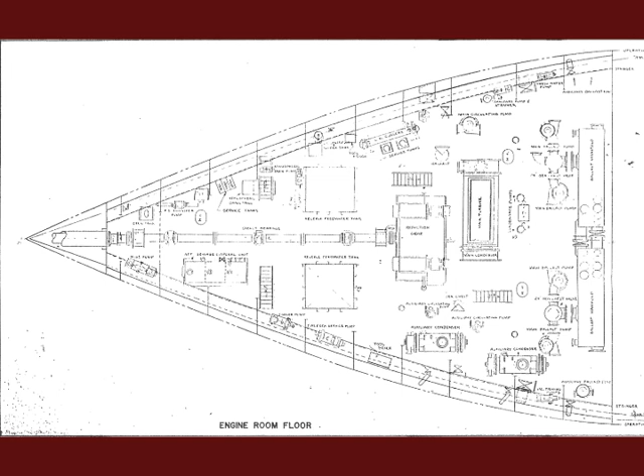Let's start with the lower engine room. For the steam engine, there's the gearbox and the condenser. The auxiliary condensers are for the turbo alternators above. There are 4 ballast pumps and a large circulating pump for the main condenser.

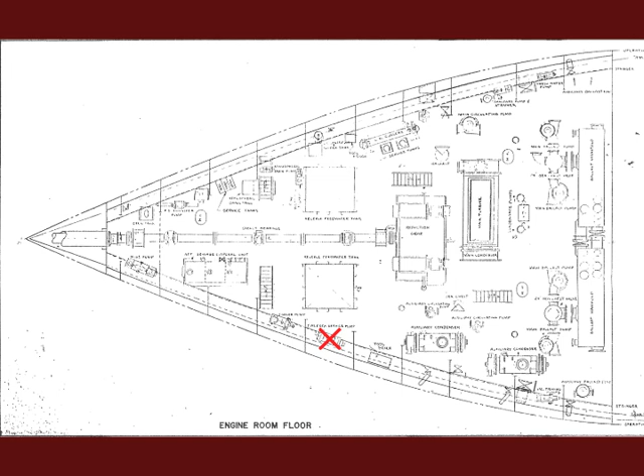The generator's condensers have their own circulating pumps. Here are feed water tanks. And here is the fire pump. This right here is the sewage tank.

This is the middle engine room. The Edward L Ryerson had a lot of power, more power than the average ship. This is the main engine. It's a 9,900 horsepower steam turbine. Here are the 650 kilowatt turbo generators.

Here are the 2 boilers. All 3 condensers have vacuum ejectors. There are 2 feed water pumps. One is electric powered, the other is steam turbine powered. This right here is the control center.

Steam is used to preheat the feed water. Here is the first stage feed water heater and the third stage feed water heater. This room right here is the chief engineer's office. This is the evaporator which creates distilled water.

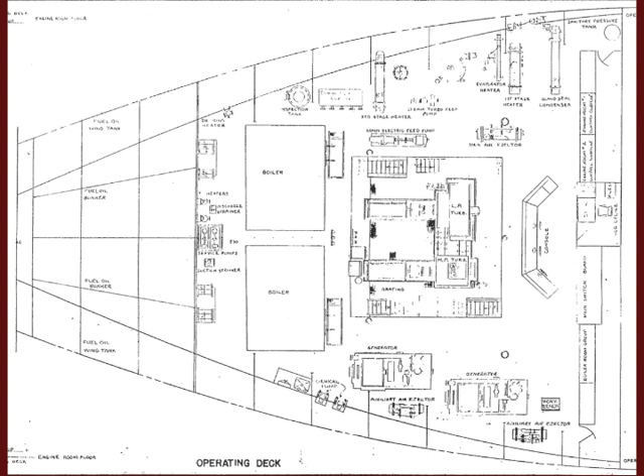This is the sanitary pressure tank which creates pressure to make water flow through the pipes for the crew to use. This is the upper engine room. In the back is the power steering hydraulics. Going forward is a tunnel through the oil tanks. The oil tanks start in the middle engine room.

Then we get back to the boilers. Here are the water heaters for hot water for the crew. This is the locker room right here, and on each side of the ship, there are the doors where you get in. This is the chief engineer's office. On the port side of the upper engine room, there is the machine shop.

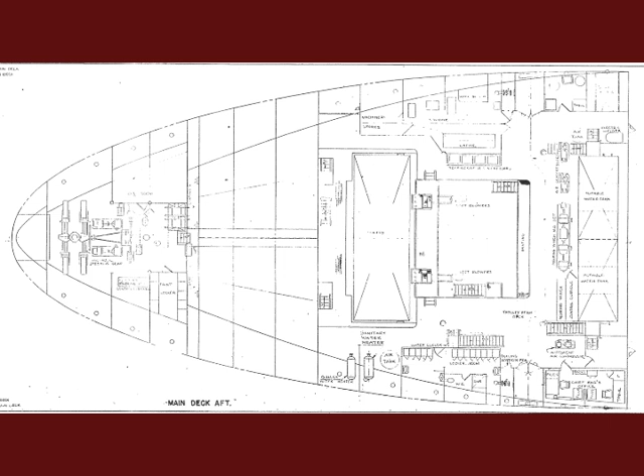This device is a motor generator unit, which converts alternating current into direct current for the deck winches. Right here is an air compressor, and right here are the potable water tanks. These are the doors that lead into the tunnels.

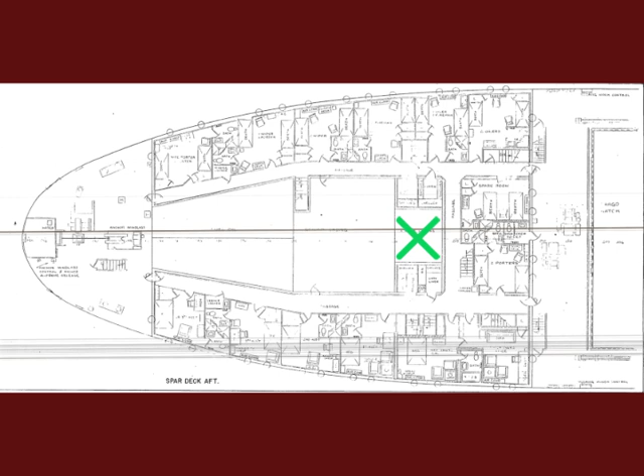This is the aft spar deck. It is mostly occupied by crew's quarters. On the back is the anchor windlass. Here is the fuel oil tank, which extends up from the middle engine room. Here is the boiler uptake, and here is the engine uptake. Going forward is the spar deck with all the cargo hatches.

This is the poop deck. On it is the stern superstructure. There are 2 lifeboats and 2 spare propeller blades. In this room is the emergency generator. Here are the electric-powered forced draft fans. They are inside the boiler casing.

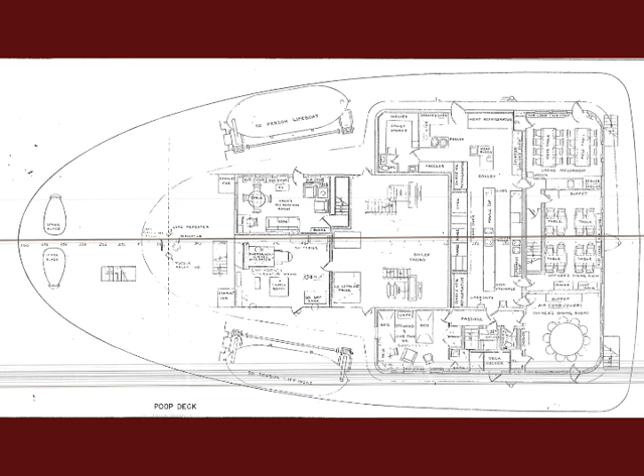Here is the crew recreation room. Most of the space up here is taken by the galley and the dining room. This is what's inside the smokestack. Here's a tank for lube oil. There are ventilation fans with air filters, and then there's the deaerator, which is the second stage of the feed water heating.